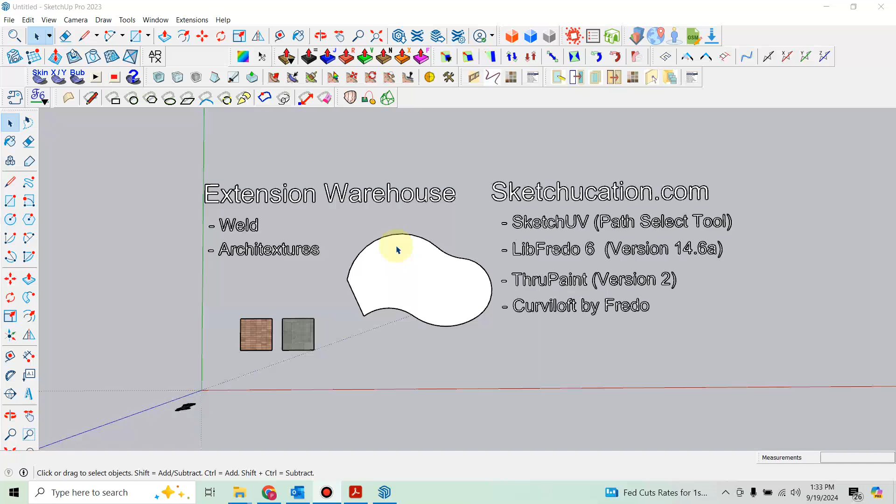This video is to help landscape designers using SketchUp put in a soldier course banding around a curved patio. I think most people understand that if you had an 8-inch soldier course in a straight line, it's pretty straightforward and easy to apply in SketchUp.

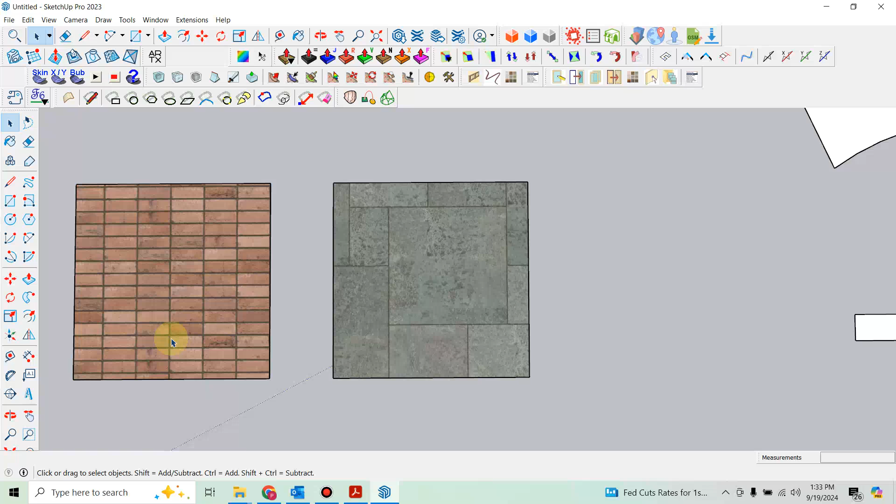So this is the paver that we're going to use for the soldier course. You have to use a stacked texture. I do recommend using Architextures for SketchUp if you're going to want to get that look.

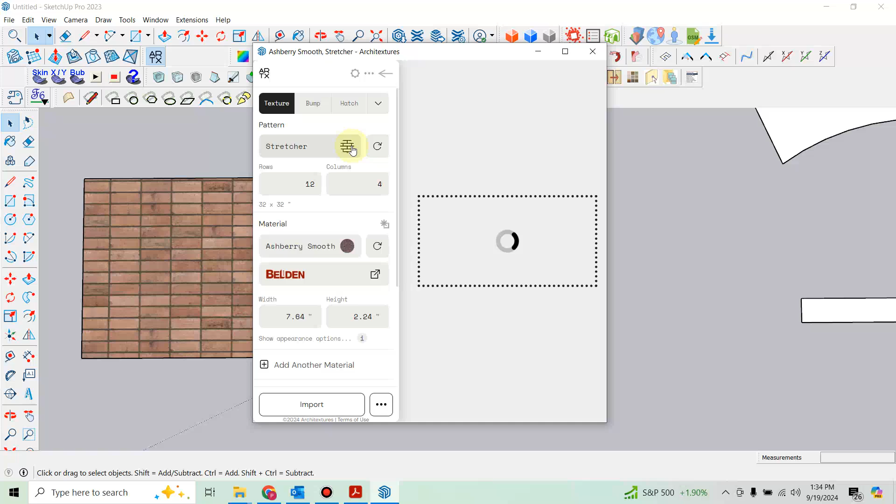You can find this in the SketchUp warehouse in some occasions, but not always. So if we went to brick, you could choose any of these, edit it from stretcher pattern to stack, and that lines everything up. Then you can import that and that'll be your material. Since I already have this, I don't really need that.

But let's say you were to apply that to this location. So we'll grab this and put it on a straight line. Now that's obviously not what we want. We want this to be a soldier course.

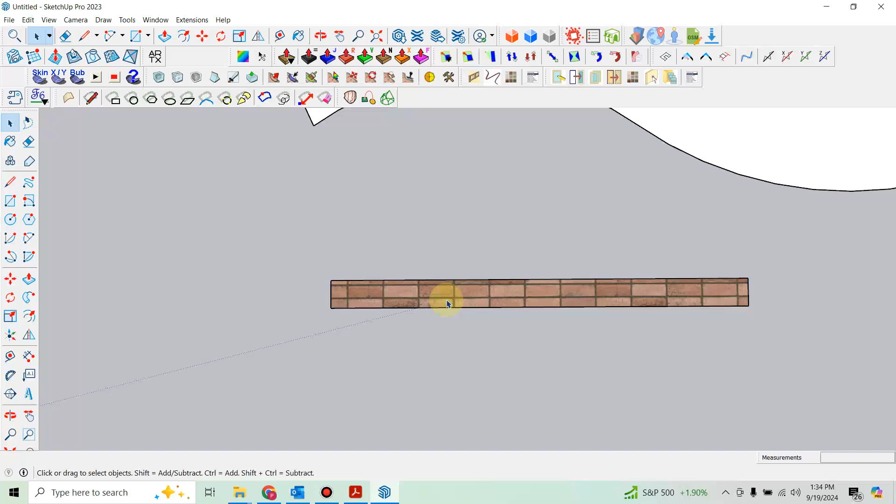There's two ways to do this. You could click the face, right click, and click on Texture, Position. You scroll out a little bit, you've got this little drag pin, you can turn it, and adjust the sizing as well. It's a little harder to get that perfect, but that's how I would do it on a straight line.

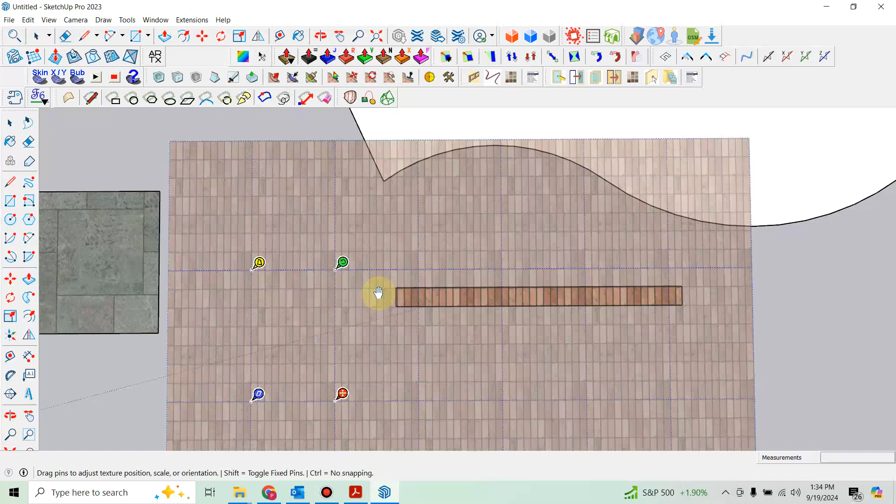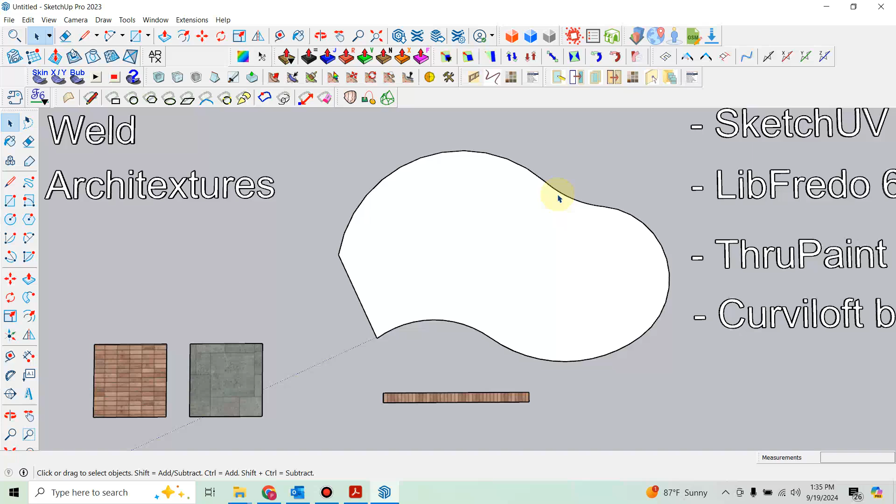Hit spacebar or enter, you can adjust it a bit more with position, and get that right there. Hit spacebar to close that, click outside, and then you can group it if you want. But the hard part is to do that on a curved path, so let's show you how to do that.

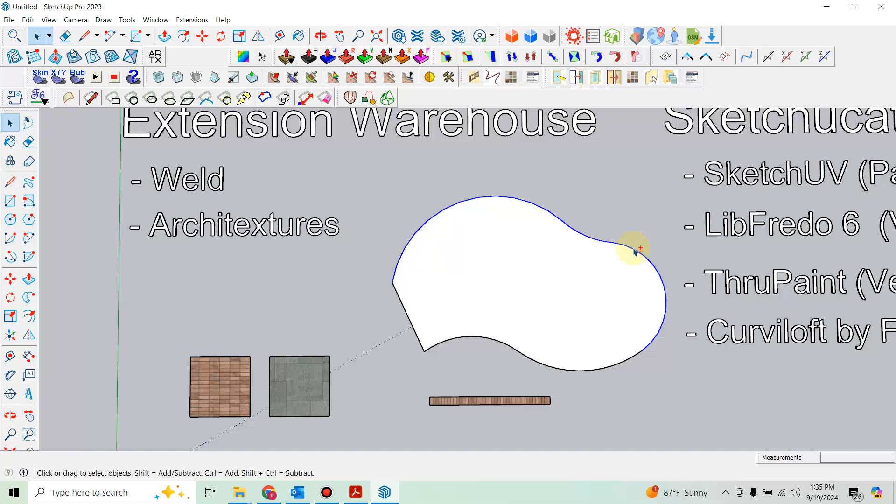Before we begin, I just want to show a couple things that are important to have from the Extension Warehouse. Weld is an important tool because you're going to have different lines here, like this line, this line, this line — you want to weld all these together. But I'll show you that in just a second.

Architextures is that plugin right here that can give you different patterns for materials. It's an awesome plugin. From the Sketchucation.com site, these are the other plugins you would probably need for this particular project: the SketchUV plugin, specifically the Path Select tool, which is right here.

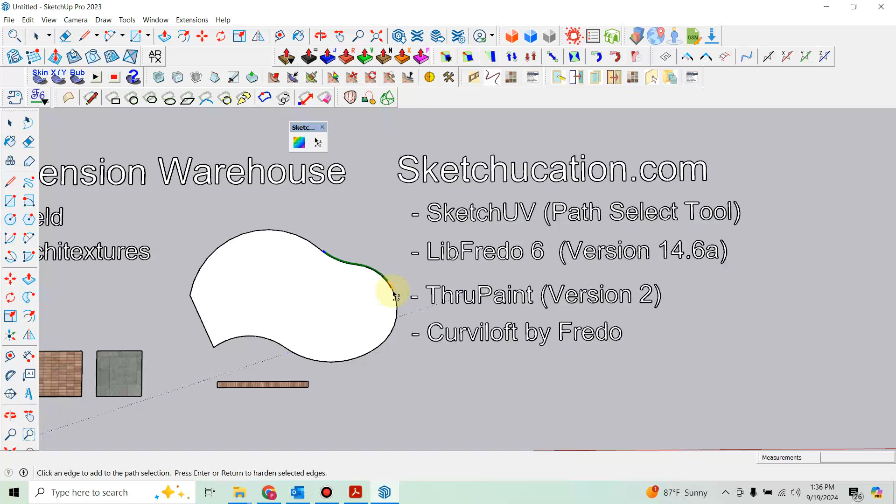This is what that looks like. I really only use it for the Path Select tool, and that makes it easy to grab certain areas. I select that — that's my first path. You can right click that, weld it, do what you want, but sometimes you need to be able to grab certain areas of a path, and that's an awesome tool for that.

Put that back up here. LibFredo6, that's just the library. Fredo is a developer, I think from France, and he's done some really amazing plugins. I recommend his entire library personally. Fredo6 is what it's called — this is what it looks like, Fredo tools.

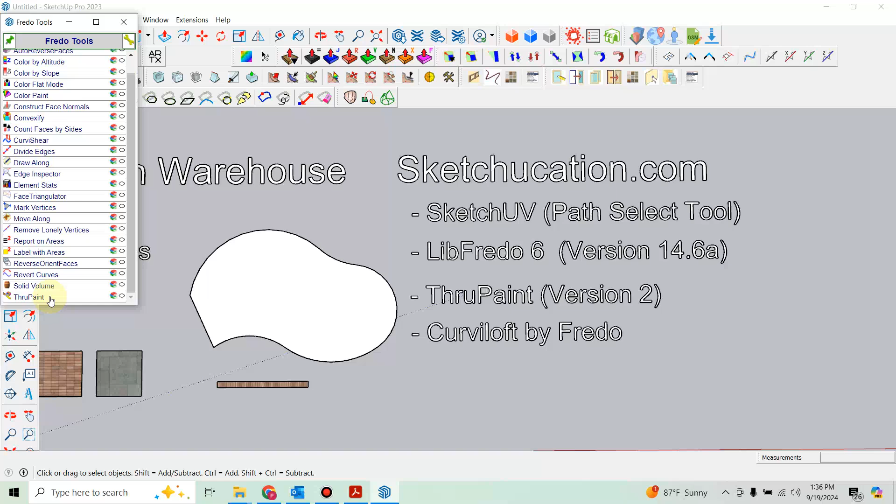One in particular is ThruPaint, and this is a really great tool for painting textures. So if you're not familiar with this, definitely get familiar with ThruPaint — it's my daily go-to plugin. I'm going to close out of that.

And then the other one he came out with is called Curviloft, and this is right here — Curviloft by Fredo. I think this is a Fredo... maybe it's by somebody different, I could be wrong. But you do have to pay, I think it's $15 for this one, but it's a permanent license. I'm almost 100% sure it is Fredo who built this one, but it's an awesome tool.

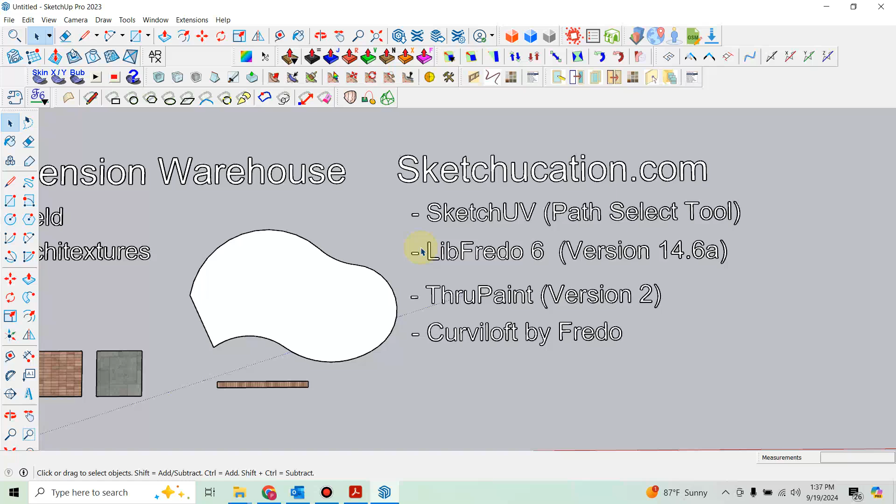I'm just kind of getting used to doing this now because I've had some issues for years trying to get banding on curved patios.

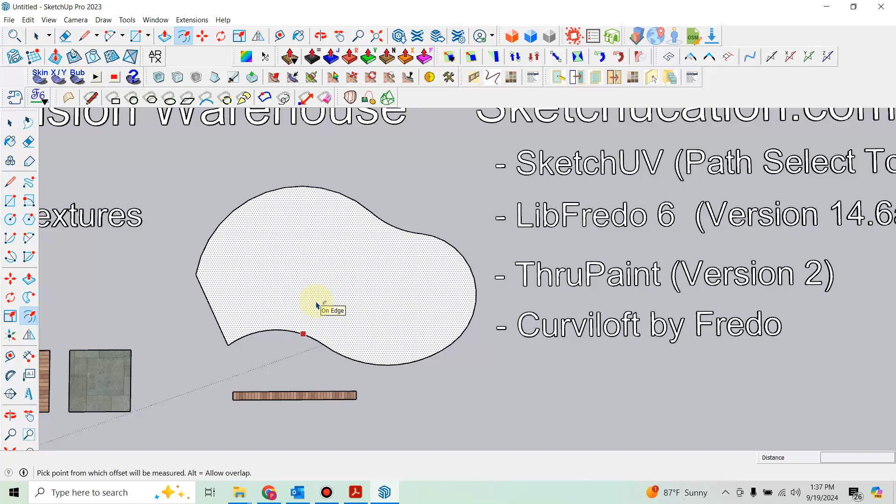So what I'm going to do here is just offset these lines. I use shortcut keys often, so this is offset. If I hit the F button, and go over here, I'm going to offset it by 8 inches. So you've got this line work done.

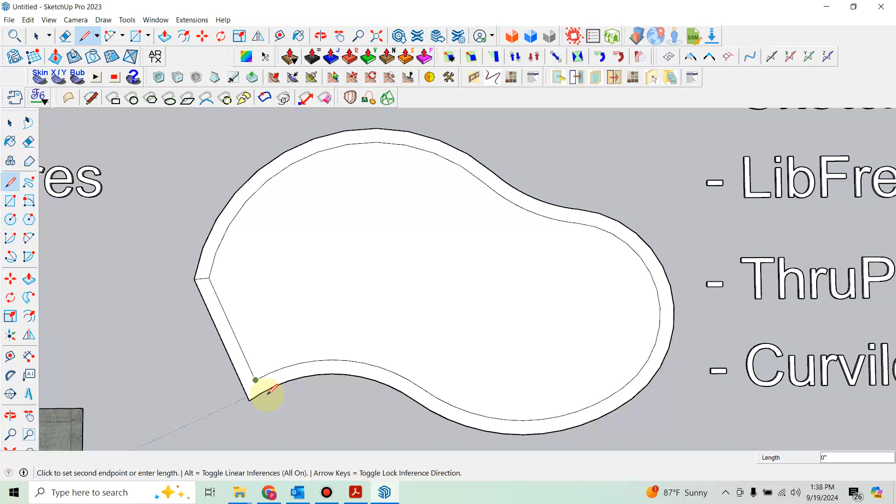We do have one straight area here where I'm actually going to delete that out and work that in another way. But for this spacing, I'll just do that, and do some line work here, close that. We'll leave that alone — the rest of it can get deleted. And then I'll delete this little line here.

We want to go ahead and weld these lines here. Now if you were in a model and for some reason you exploded the line, sometimes it's just going to give you these little bitty tiny segments all the way around, and it's unreasonable to try to select every single one of them.

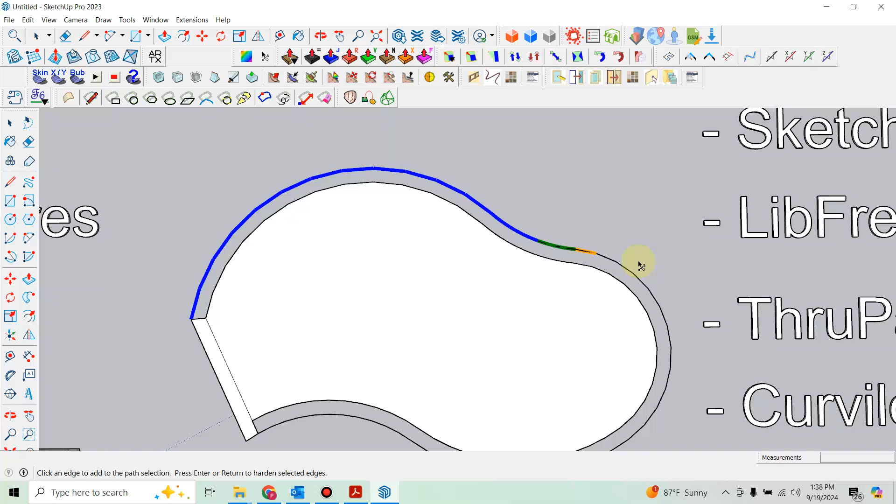So that's where that Path Select tool comes in handy. You can just grab it like this, go all the way through — you can see right now it's actually broken them down a little bit. So come all the way through here and close it, right click, hit weld, and that'll be one solid line all the way around. And then the same for this one — this one hasn't been exploded or anything, so I'm just going to go ahead and select these.

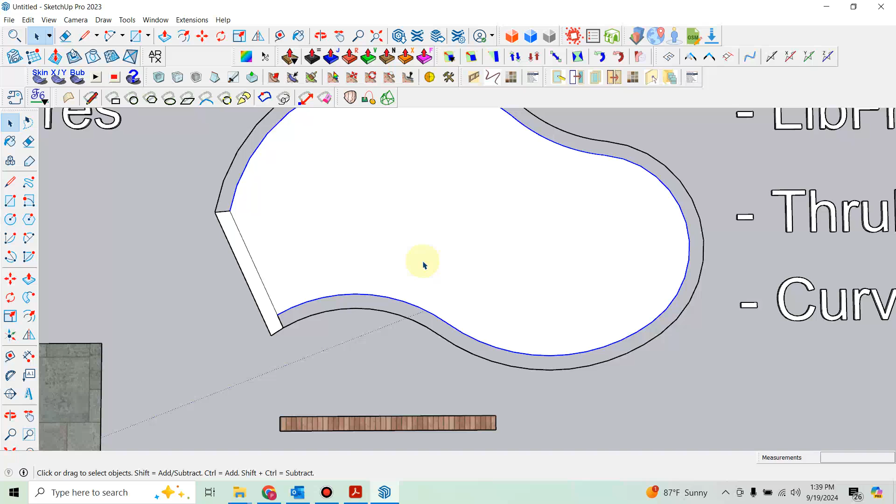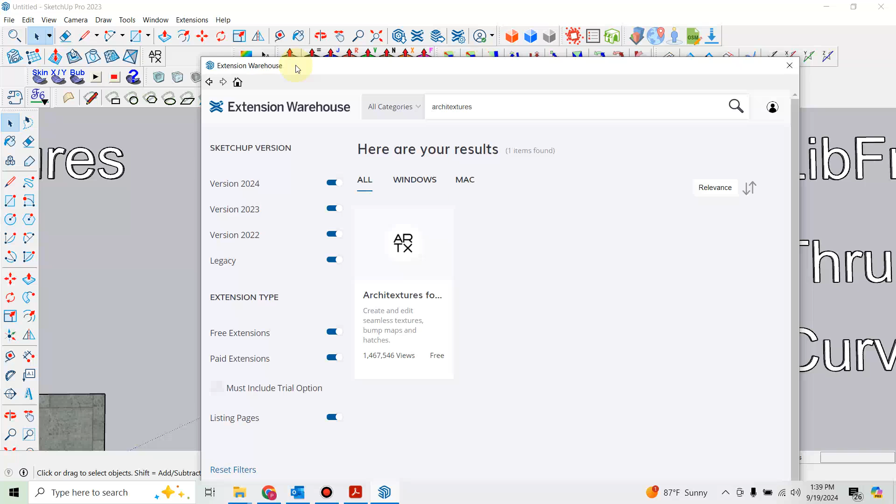Actually, you can just double click in here, turn that off, close that. Then make sure you're hovering over that line, right click, hit weld edges. I don't know if SketchUp natively has that weld feature—this is a 2023 version. If not, there's an extension called Weld you can get from the Extension Warehouse.

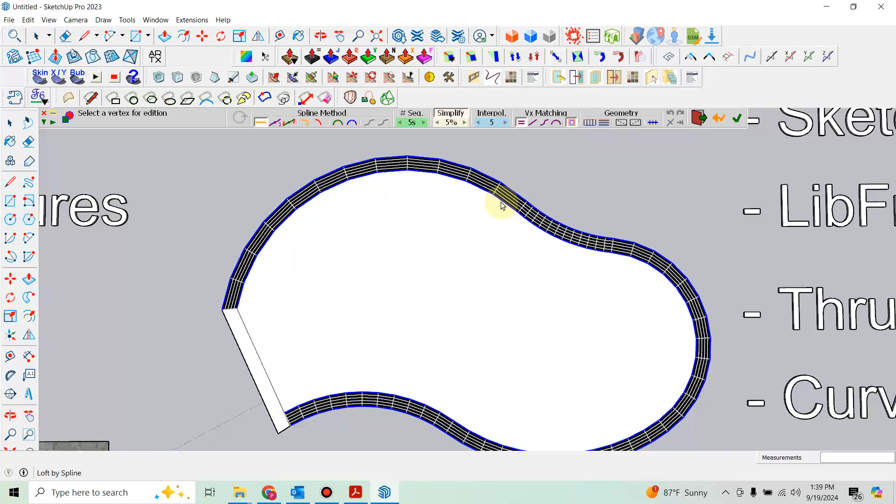Okay, so now we've got both of our lines selected. I'm going to go to that Curviloft tool Loft by Spline and select that. As you can see, it's gone all the way around and given us kind of a hidden geometry. If we zoom in, you can see what's going on.

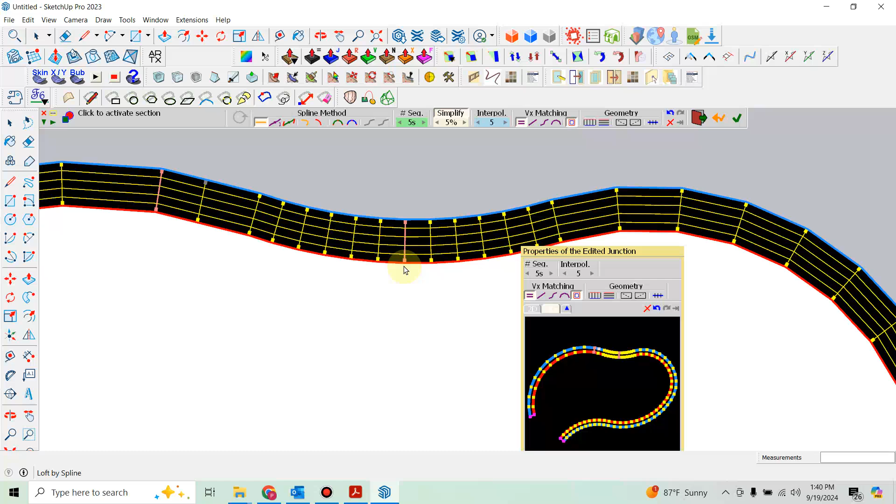Sometimes these lines get really skewed—you might see a line way over this way. All you need to do is take that line and move it back while you're in this mode. As you can see, I've kind of messed it up already, but that's working now. See if we can get that straight. The idea is you want to make this perpendicular—these lines need to be perpendicular with the outside edge perimeter lines as much as possible.

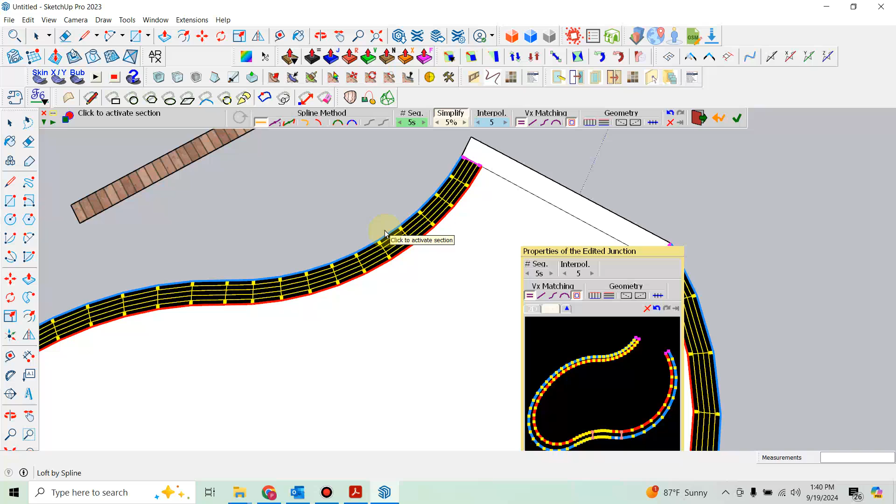This is a new tool for me, so I'm not 100% familiar with how it completely works, but so far so good. It looks pretty good in my opinion.

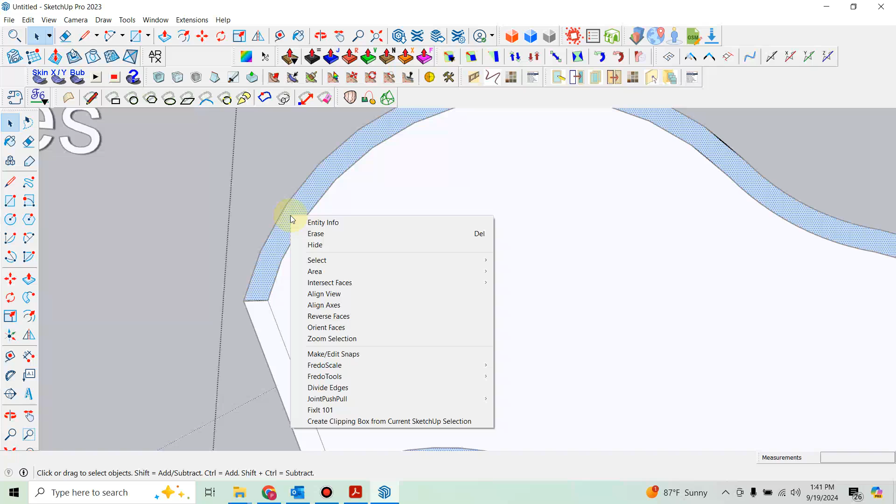So what I'd do from this point is go ahead and hit enter, then turn that off. You can see it reversed the face, so I'm going to hit spacebar, click in here—it's a group—and reverse the face just for good drawing etiquette.

Then I'm going to grab my paintbrush tool bucket, go ahead and select the stack that we want. I'm going to get into this face, still a group, and click the shortcut for my ThruPaint, which is right here—I just have a little shortcut button on my computer. You can see we've got a line coming through here.

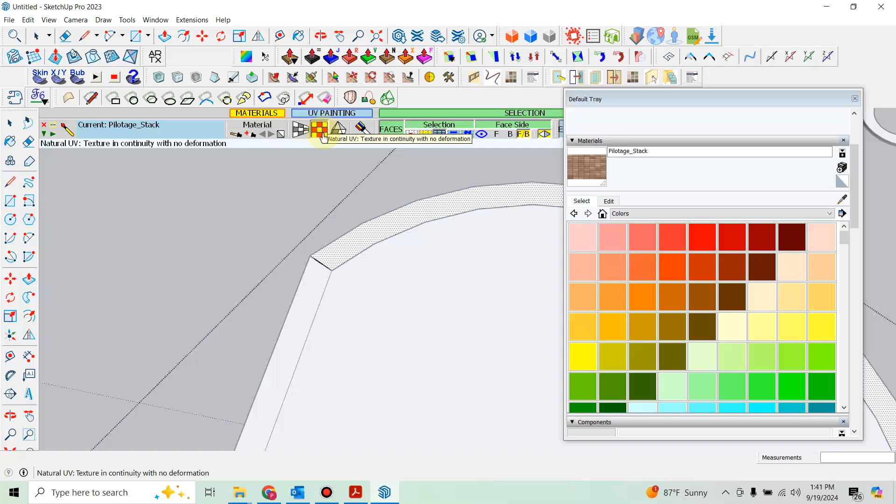The red line is on a horizontal plane coming off of these perimeter edges. You want to make sure the UV paint button is not on this one, but it's selected on this one here. Just click right inside here, hit enter, hit spacebar, close that out. As you can see, it goes all the way around and does a pretty good job of giving us that soldier course banding.

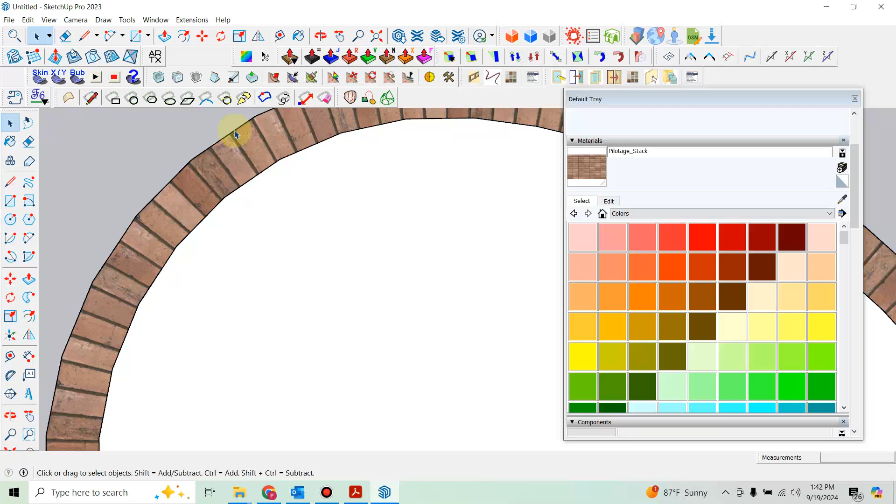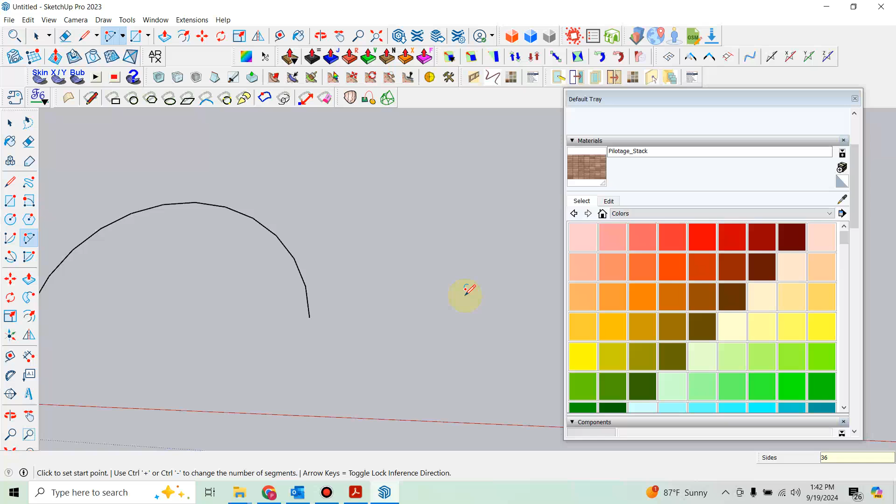Now, the curves I made on these perimeter lines were pretty choppy. Basically what I did was use my arc tool and just went right through here, which gave us a lot of segments. You can change that too—if you take your arc tool before you do anything with it, it says sides down here. Let's just call it 36, give it 36 segments. Wherever we go on that, you can see it's a lot smoother now.

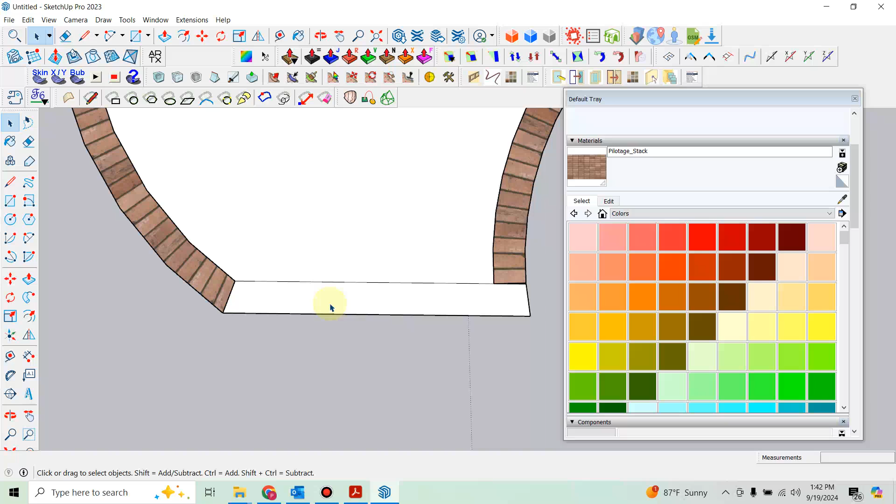That would make this a little bit better looking. So there's that. Then in the straight areas, I find it's hard that it doesn't do a good job of going from curve to straight, so I'd suggest cutting that off and making it its own thing right here.

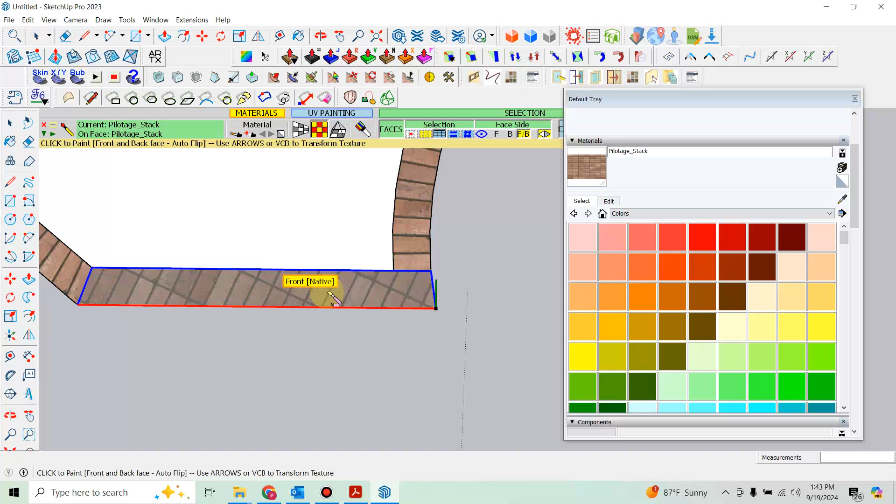Grab your stack and use your regular ThruPaint tool again, but instead of keeping it on UV painting, you've got to change it back to native UV. Then find the crossbar with the red and green—make sure it's parallel to the perimeter line, and go ahead and click that, hit spacebar.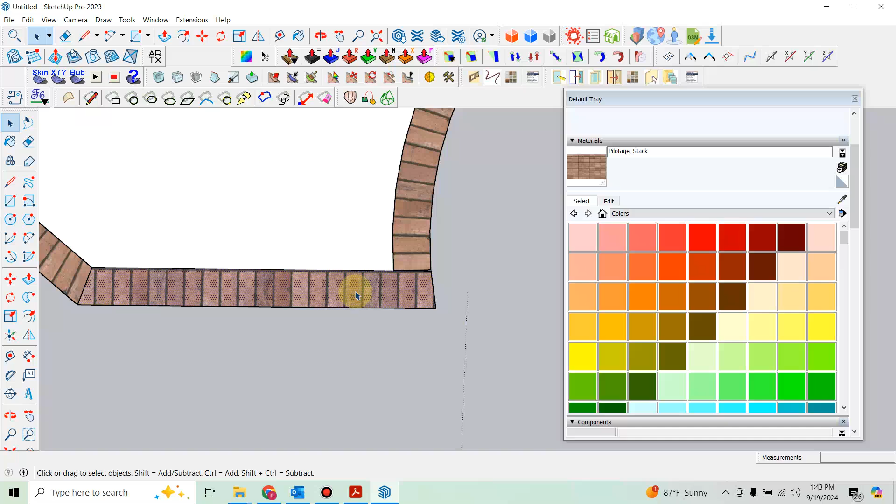Sometimes for good measure, if you need to adjust things, I'll use the texture button here—it's sometimes a little easier. Maybe we want to put a little bit of a joint right on that point. You can even make that a little smaller if you wanted to, but that all works.

Then what I'd probably end up doing is just exploding this area too. So now at least you've got everything lined up here, and you can go ahead and fill in the inside.

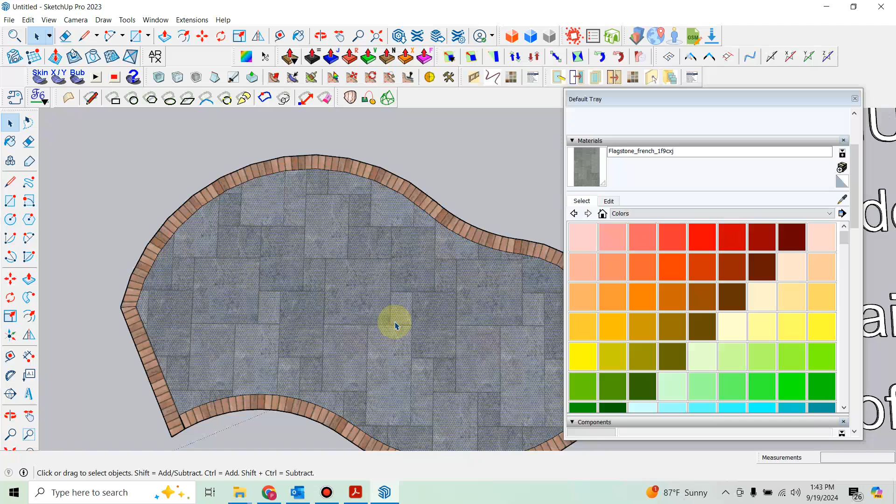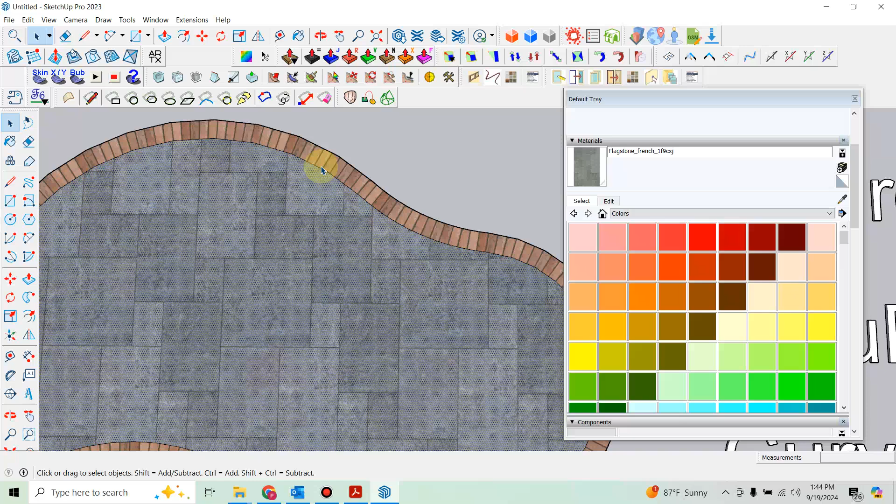And that's it. This has been a challenge for me for years, and I hope this can help other landscapers—this could work for other applications too. This is what I primarily need it for, and this is good enough for me. I don't need anything much better than this. I know there are better, more confusing ways to do this, but this seems pretty easy, so hopefully it helps.